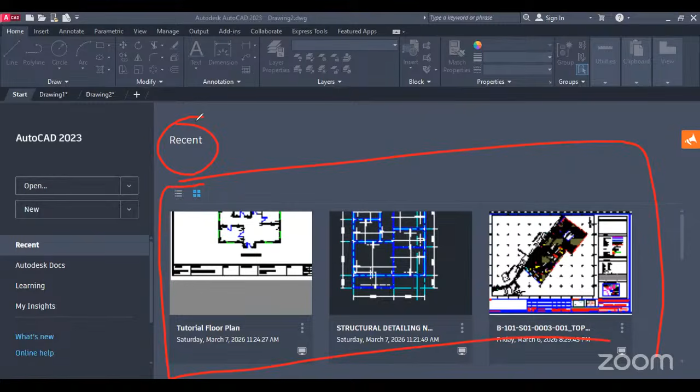So this is my welcome screen. If you also open AutoCAD for the first time, this is what you are supposed to see. Here we have Recent - all our recent drawings, everything I have drawn previously on AutoCAD.

Then some other thing you can see is this is AutoCAD 2023. We also have Open, which is to open previously saved drawings, and New, which is to create a new drawing on AutoCAD.

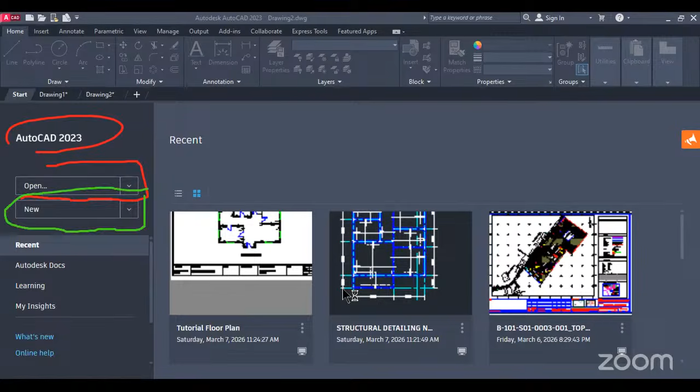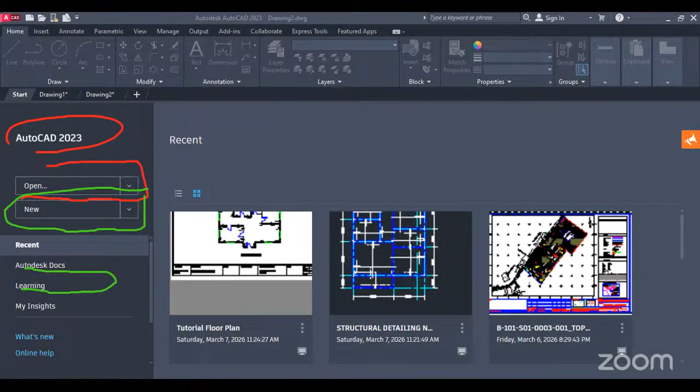From here also you can see learning materials developed by AutoCAD for those who are novices, newbies in learning how to use AutoCAD. You could use those learning materials to check and know some of the things you could learn from that.

So we are going to open a new drawing. What we just need to do is click on New.

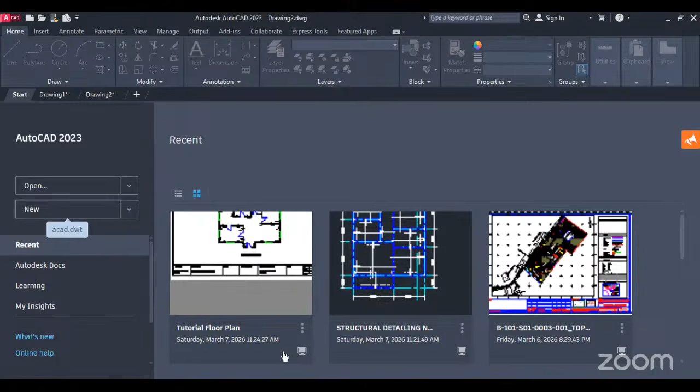So this is what you are going to see next: a blank screen like this. Some of you, your workspace will be white. You might see a white dashboard or a white environment. Don't be scared, it's the same thing.

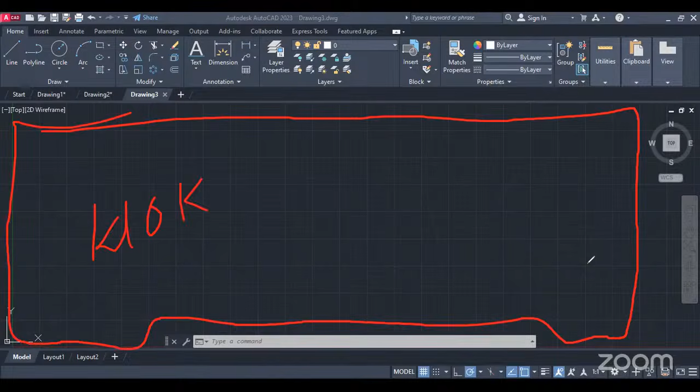So the first thing, one of the things we are going to look at is our workspace. So here, what we have here is our workspace. This entire section is our workspace.

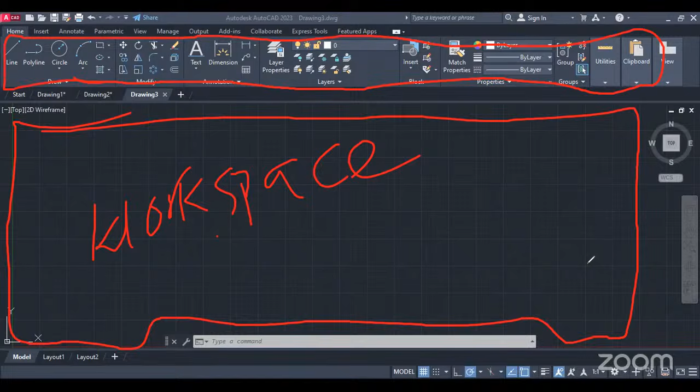Then we also have this. What we have here is called our ribbon. This entire place is called ribbon. So this ribbon is divided into different sections, and each of these sections is called a palette. So we have the draw tab, the draw section, we have modify section, we have annotate, we have layer, we have block, all divided into different segments.

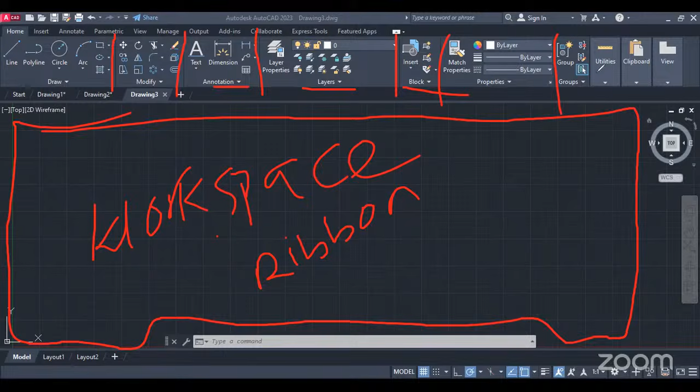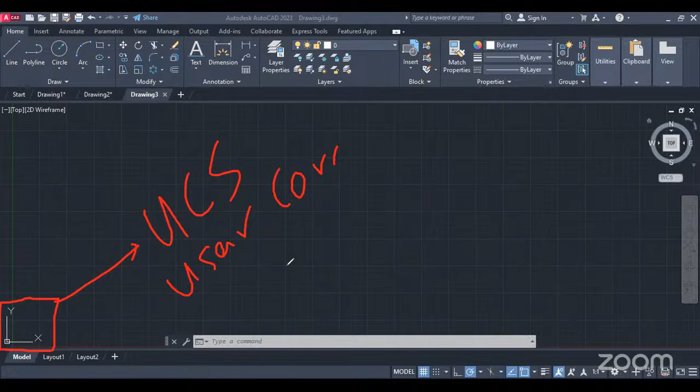Then after that, there's some other thing we need to look at, and it's called our UCS, which is this. UCS, which stands for User Coordinate System. Yeah, User Coordinate System. That's basically what UCS stands for.

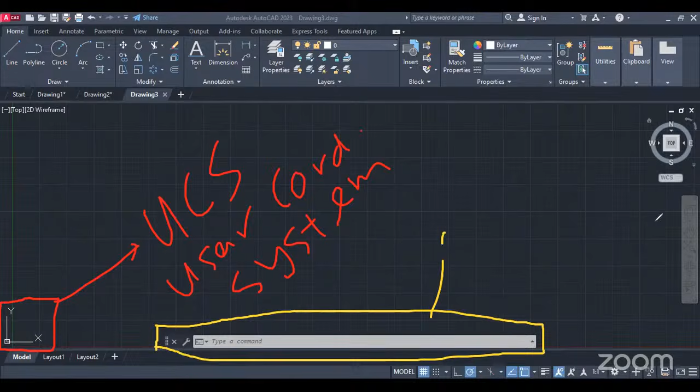Next thing we have is this, and this is called command line. So basically, what does the command line do? Why is it necessary? From my experience, the command line is one of the most important, delicate tools. You can't overemphasize the importance of using the command line. One, the command line makes your job become faster. Instead of clicking on maybe the line tool, which is this, you can simply come here and type line, and you can use the line tool, or use the shortcut L, and you can also access the line tool. So there are different shortcuts, like for instance, offset.

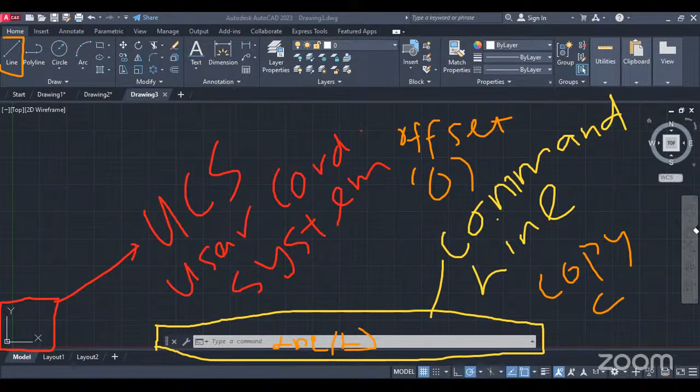Offset, you can use the shortcut O. For copy, you can use the shortcut CO. Let's see, C is for circle, CO is for copy. So instead of clicking, if I want to use the circle tool, I just type C, and I can use the circle tool. I can also use CO to copy it. So you see, I'm actually faster using my command line to get this.

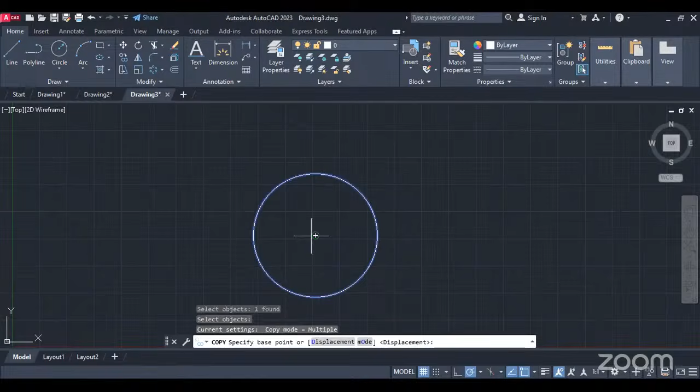So that's that for the command line. The next thing we are going to look at is our view cube. So these are the view cube. This is our view cube. Here, this box is our view cube.

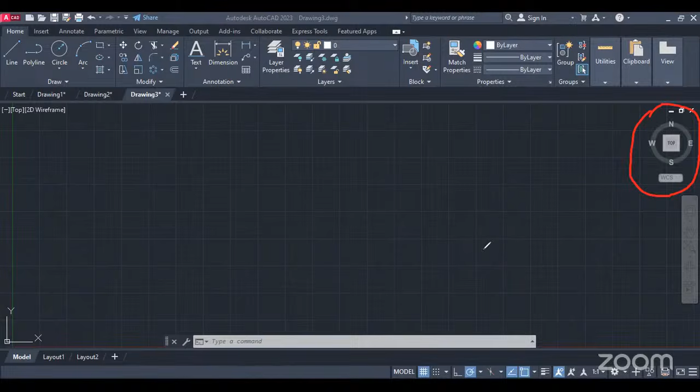So just like the name implies, view cube, what does the view cube do? The view cube enables you to have different views of the object you are working with. So you can decide to look at this object from southwest isometric, southeast isometric, whatever angle you want to look at it from.

You can always use your view cube. And as time goes on, there's going to be some kind of paid section, which we are discussing with APWEN Lagos chapter to see how it goes, where we are going to get into this deeply. Like for cybersecurity, this is a short class, a short course, let me put it that way. You can't learn everything you need to know in any of these courses in a short while. So after this class, you're also going to have a detailed class where we take a good amount of time to go deep into all these tools.

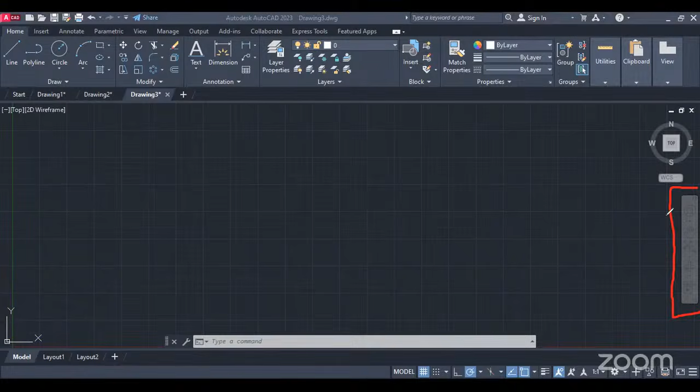So the next tool we are going to look at is this, our navigation panel. Our navigation panel is used to effortlessly navigate between different options. And these navigation tools, we have something like our pan. So our pan is using dragging from navigation bar.

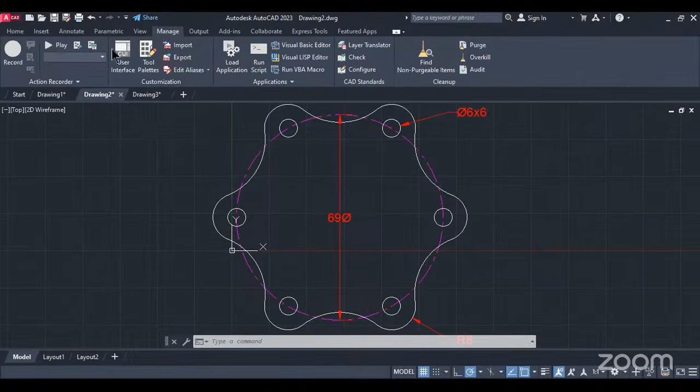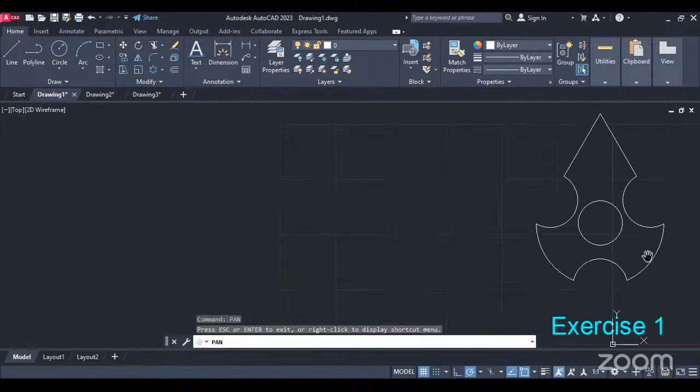Okay, so I guess I'm going to use another example in illustrating a point. Same thing, so the pan tool is used in panning. You can use it in dragging your drawing around to effectively reposition it. So this is basically what the pan tool is used for.

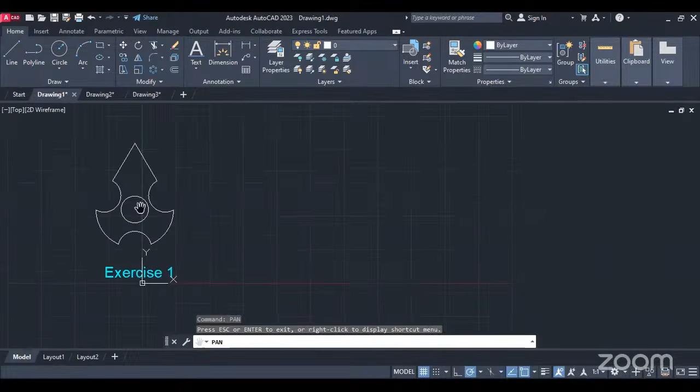So for those of you that are using a mouse, you can use your scroll button to scroll in and out. And when you press your scroll button, you press down the scroll button and move. That's your pan tool. You can actually pan here, pan here. You press down your scroll button and hold, press and hold, you activate the pan tool.

Then we also have the zoom tool, which you can use to zoom in. You can zoom extents, zoom window, zoom previous, zoom realtime, zoom all. There are a lot of different zoom features here, so whichever one you want. Basically what we use is that we are zooming in or zooming out. And one of the zoom features you can use is zoom all. So if you have a lot of things going on in your workspace and you want to see everything, you can use the zoom all.

Okay, so another thing we are going to look at is this little plus icon here. If you click on this plus icon, you can create a new drawing. Please give me a minute.

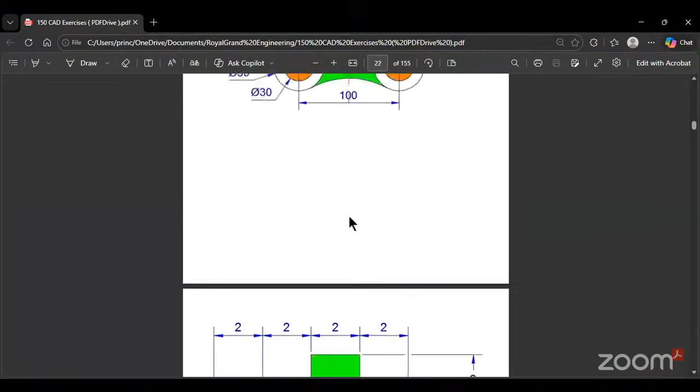So before the end of today's class, we are going to look at this. We'll be able to do this simple drawing, something like this. We'll be able to do simple drawings like this in AutoCAD.

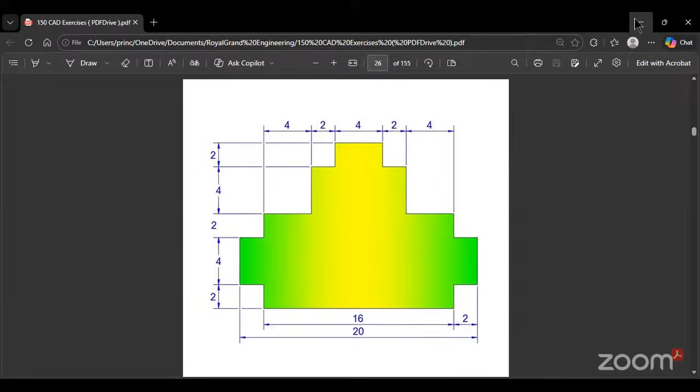But before we start doing all this, let's know how to use the tools first. So the first tool we have here is our line tool. Now this is our line tool.

There are a few tools here that are very, very important. We have the line, polyline, circle, rectangle, polygon, we have hatch. These draw tools are very, very important. Whatever you're doing in AutoCAD, if you can't master these tools, you won't really go far.

So what does the line tool do? The line tool is for drawing line segments. So we have point A here, we have point B here. So this is B and this is A.

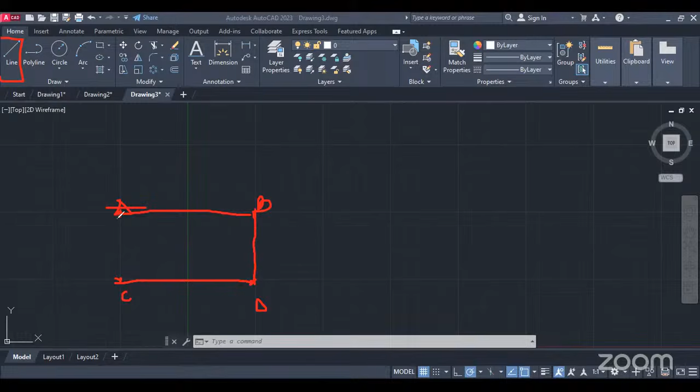So you can draw a straight line from here. We have another point here, we have another point here. We have C, we have D. You can also use the line tool in doing this, and what do we have? It's a rectangle rather. So the line tool is basically used in drawing segmented lines.

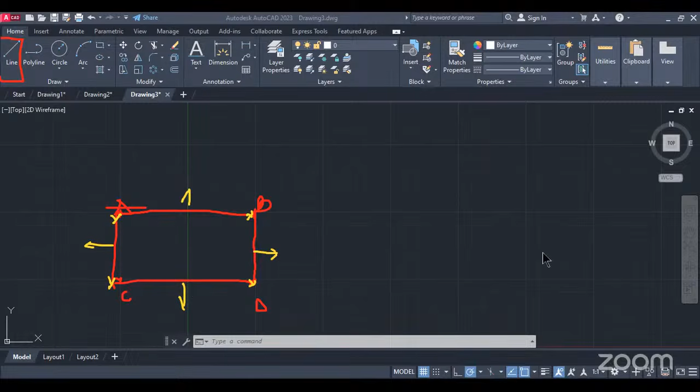When we say segmented line, it means these 2 points are on its own, these 2 points are on its own. Here on its own, here on its own, here on its own, here on its own. They are not joined together. So that's basically what the line tool is used for.

You can use it in drawing lines, and how do you do that? You specify the start point and the end point. So you click here - this is the start point. You click here, click here, click here, click here. Hit escape. So you can see I've clicked on this.

I can move this out. Just like I said, these points are segmented and they are totally different, independent on their own. So the next tool we are going to use is the polyline tool.

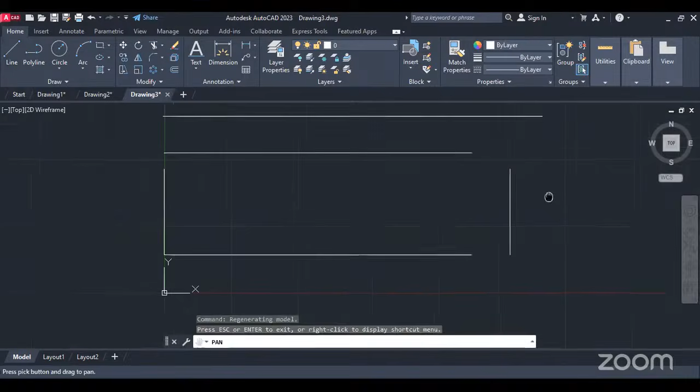So I'm currently using my pan tool to move this - that was why I introduced it earlier, a tool we'll be using frequently. So the polyline tool works the same way the line tool works, but this time it is in a continuous form. It's not breaking, it's not in a segmented form.

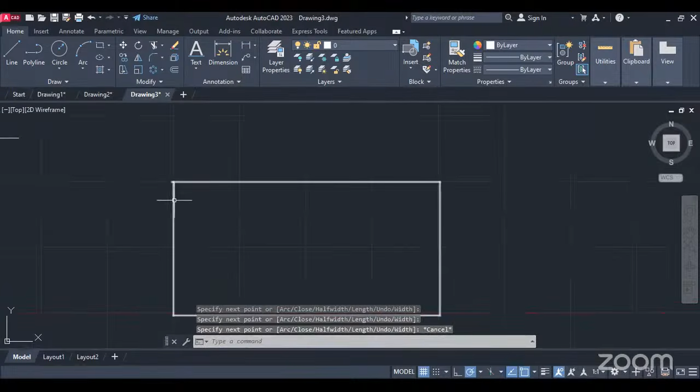So I'm going to still draw something similar to what we did with the line tool. So for this now, you can see that this line is joined. It's not like the line tool that you can easily separate them into different segments or different points.

Next tool we have is the circle tool. Under the circle tool, there are lots of options. We have center radius, we have center diameter, we have 2-point circle, we have 3-point circle, we have tan radius. For this, we are just interested in the center radius.

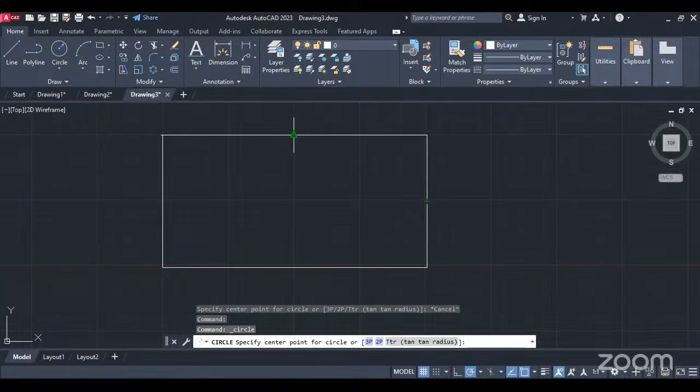So what it means for you to draw this circle, you need to specify the center point of the circle and define the radius. I can decide this is the center point, I'm going to click here as the center point, then type something like 0.15.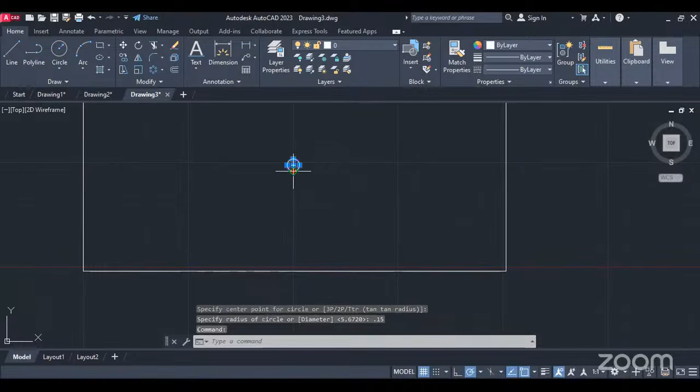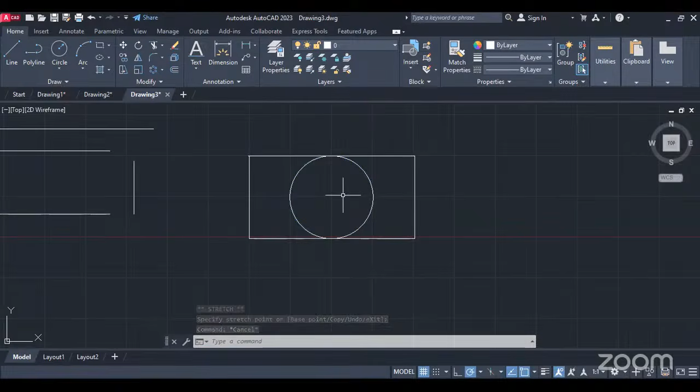Sorry, what I had here is... okay, so let's use the other points. You can also specify if you want to. So I can click here and type 2 as the next point. So you can see that 2, that's the radius. I believe this is well understood, this basic part of my teaching.

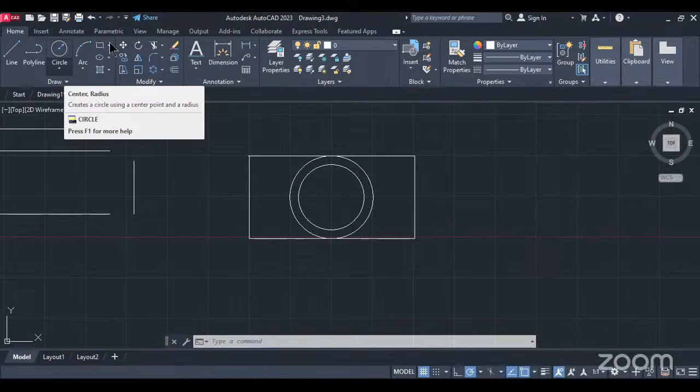Okay, after the circle tool, the next tool we are going to look at is the rectangle tool. The rectangle tool works similar to the polyline tool in a way that when you use the rectangle tool in drawing an object, it is continuous, it is connected. There is no break anywhere.

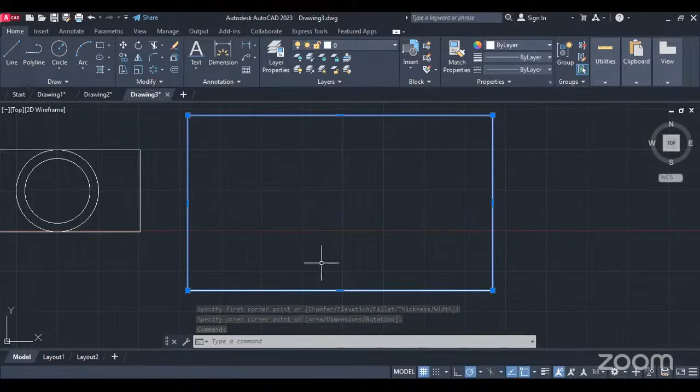So we are just going to take these three examples for today's class. Okay, just give me a minute.

Okay, so I said we are going to do something today. Let me share my exercise file.

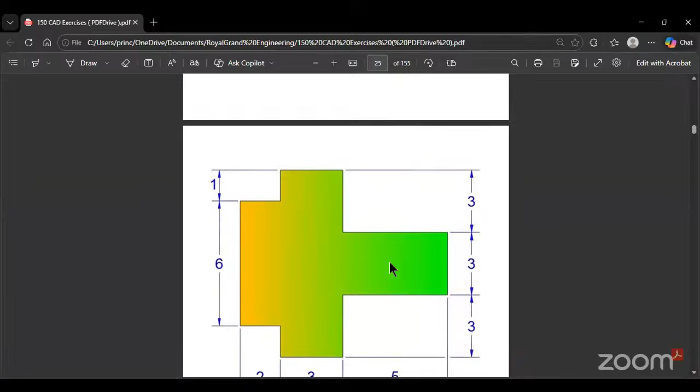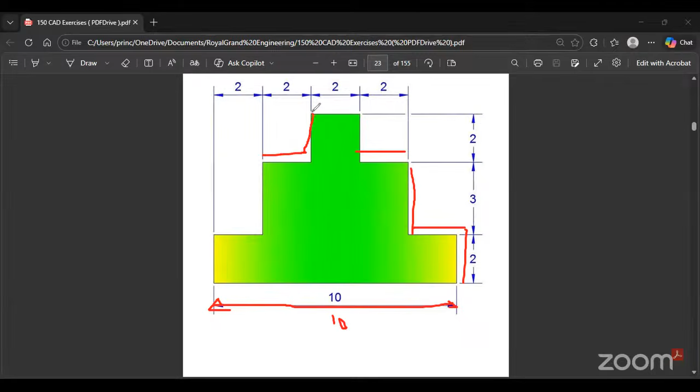Okay, so this is what we are going to do. We have this, we have this, then we have 2 here, we have 3 here, we have 2 here, we also have 2 here. 2, 2, 2, 2, 2, 2.

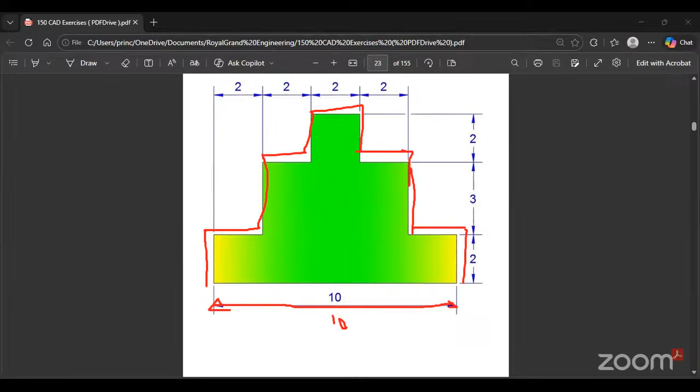So this is how we are going to use the line to join this, or go back to this. Click on the line tool.

First thing we need to do is to set our units. Hit enter. In order for you to set the unit you want to be working with, you type units on your command line, then hit enter. For this, I'm using a whole number, and my scale is in millimeter.

So from our example, I'm going to type 10. This is what I have here, 10. Hit enter, move upwards, type 2, hit enter, move this way, type 2, hit enter, move upwards, type 3, hit enter, move this way, type 2, hit enter, zoom out a little bit and pan down, move upwards, type 2, hit enter, move this way, type 2, enter, move down, type 2, hit enter, go over here, type 2, hit enter, come down, type 3, enter.

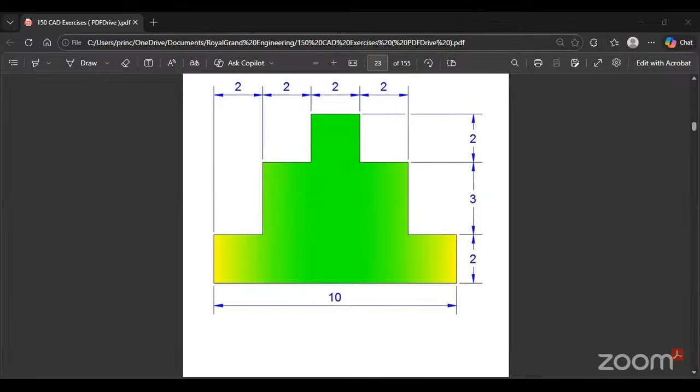Okay, see what I did, but we are going to do it all over again. I didn't know the diagram was showing. So I believe you all have seen the diagram a lot. So what we are going to do now is to type units. We need to first of all set our units, the units we are going to be working with. So you heard the audio, the previous one, the practical session.

So I'm going to hit enter. After typing units, set this one to whole number. Move this down to millimeters. Click on OK. Believe this aspect is well understood.

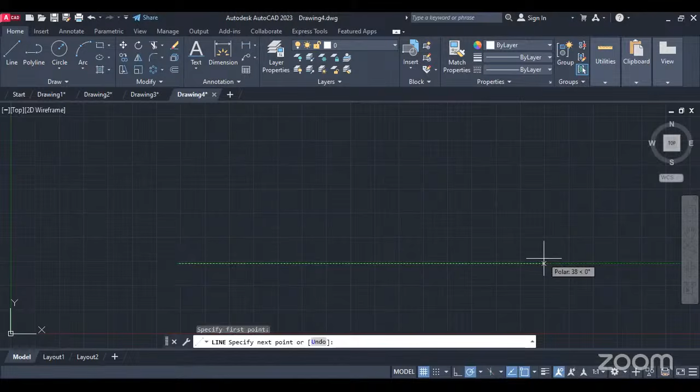Okay, so what I just did was to set the unit, and I'm going to click on the line tool, this is the line tool, I'll click on it, click on one point, click on this point, then move my mouse this way, type 10. Okay, so we have drawn our first line.

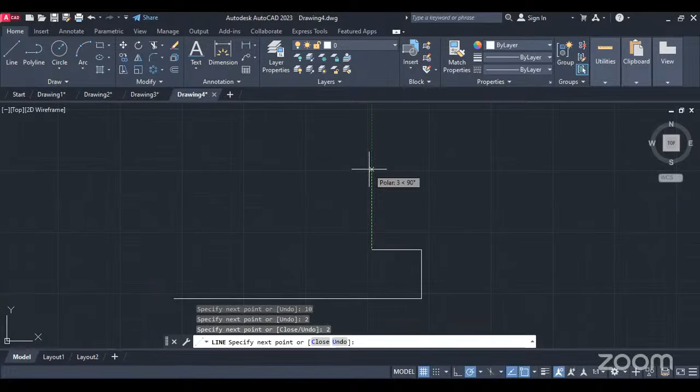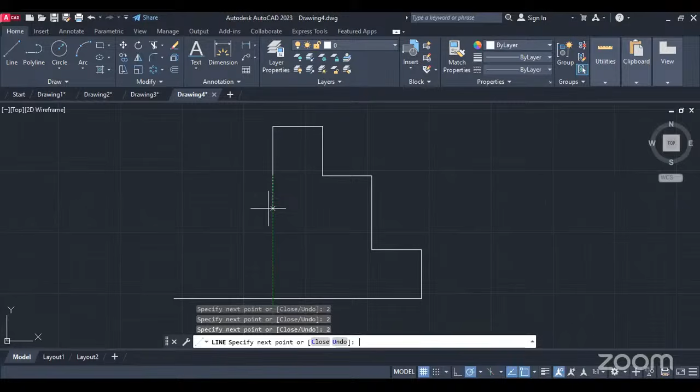I'll move my mouse upwards, type 2, hit enter. I'll move it to the left, type 2 again, hit enter. I'll move it upwards, type 3, hit enter. Move it this way, type 2, hit enter. Move it upwards, 2, hit enter. Move it horizontal, 2, hit enter. Move it down, 2, hit enter. Move it here, 2, enter. Move it down, at 3, enter. Move it this way, 2, hit enter. Come down, at 2.

And this is it. So I believe you all saw this part. So this is our assignment for today now. I'm going to drop it on the group chat.

So does anyone have any question on what I just did? Any challenge? I believe it's well understood. It's just I took my time, from the starting point up to the end.